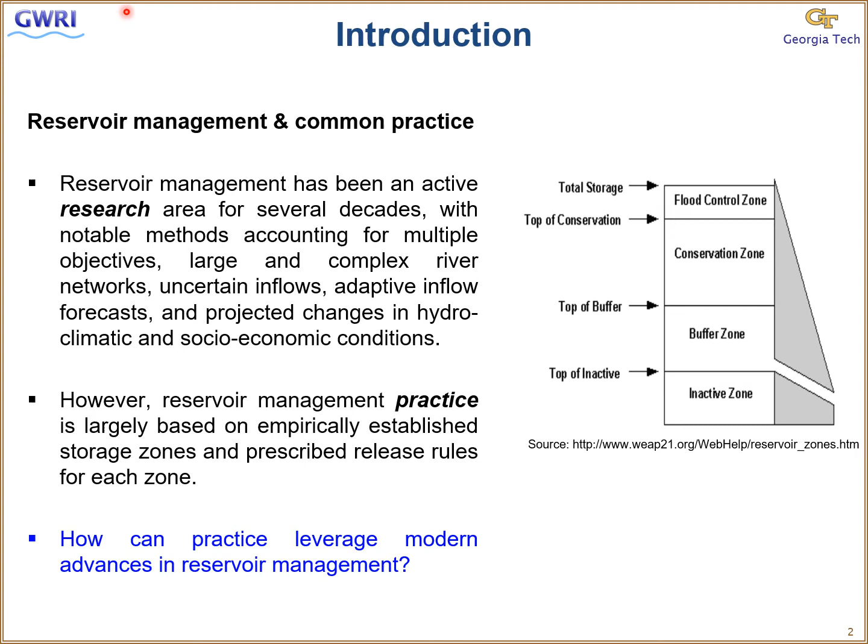The study work plan is divided into 4 main objectives. Objective 1 is the development of a fully adaptive optimization scheme for the reservoir system. The second one is the retrospective assessment of reservoir system response under various hydroclimatic and socio-economic scenarios. The third one is the delineation of concurrent seasonal zones at all system reservoirs based on the optimal reservoir sequences that we derived in objective 2.

The fourth and final one is the performance assessment of the optimized versus the original or current zones through detailed head-to-head simulations with the US Army Corps of Engineers HEC-ResSim modeling.

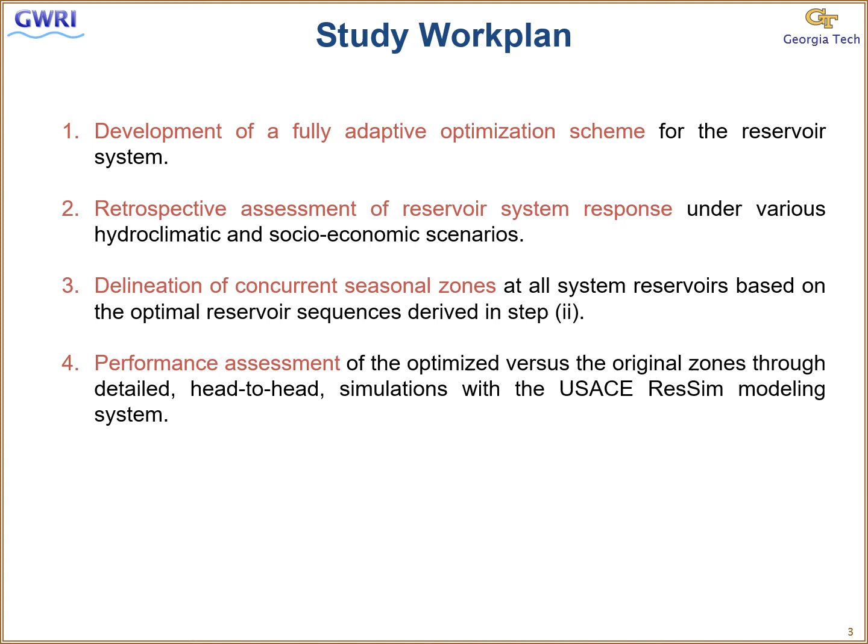The study area is the ACF Basin. The ACF Basin is in the south of the US, between 3 states: Georgia, Alabama, and Florida. The Apalachicola, Chattahoochee, and Flint are the main rivers of the ACF Basin. The ACF Basin starts from the north of Georgia and ends in Florida after passing through Georgia and Alabama. The ACF Basin hosts approximately 4 million people and a wide variety of plant and animal species.

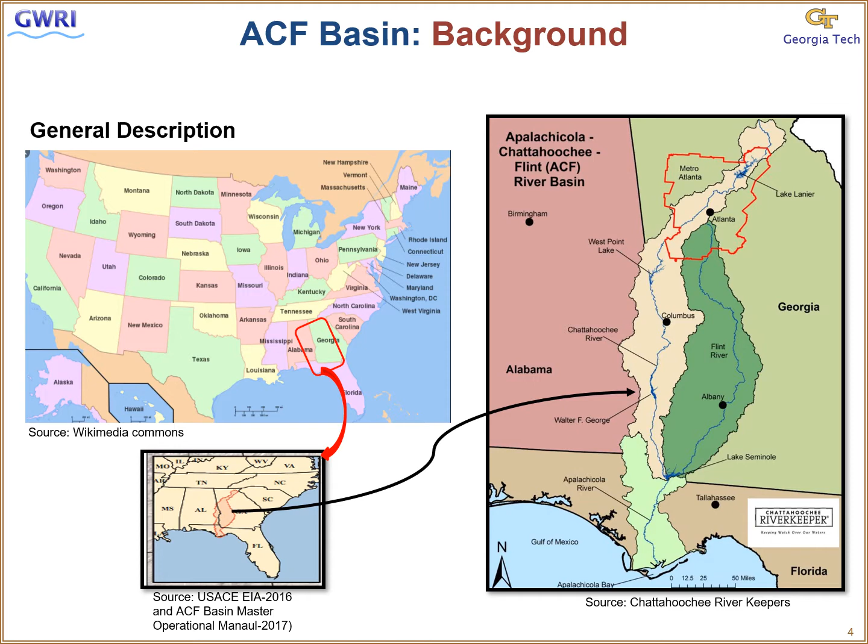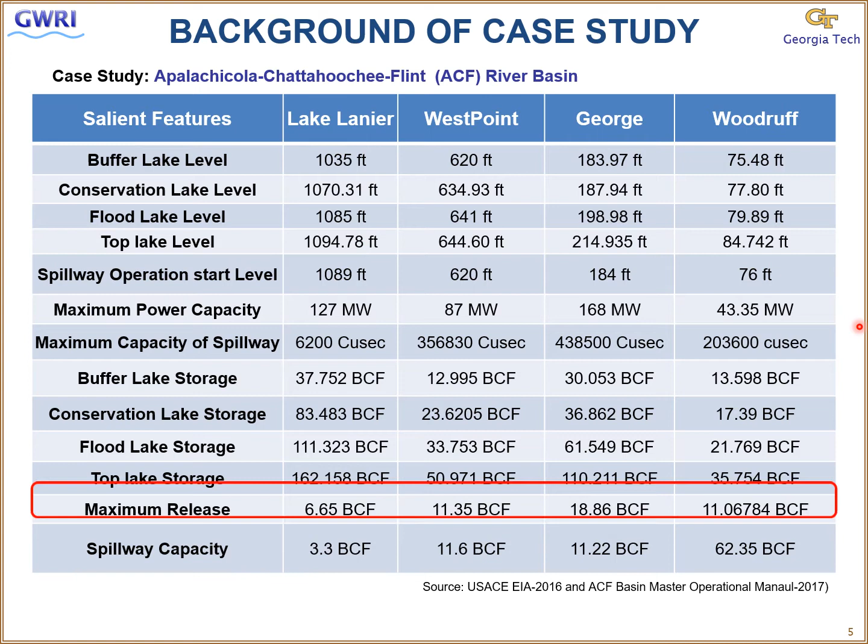In the last 3 decades, due to increase in population and climate change, water demand for each state has increased, which resulted in a conflict between the states. That's why these states have been in litigation for the last 3 decades. In the ACF Basin, Lake Lanier, West Point, George, and Woodruff are the main reservoirs, and among all those reservoirs, George has the highest hydropower generation capacity, while Lake Lanier has the highest storage capacity.

This slide shows the comparison of the ACF Basin main reservoirs' storage capacities versus the local annual unimpaired flows to those reservoirs. This pie chart represents each reservoir's storage contribution to the whole ACF basin storage. It shows that Lake Lanier has 63% of the storage capacity of the whole basin, while Woodruff has 4%. And on this pie chart, we can see the percentage of reservoir drainage with respect to the whole drainage area of the basin. Here you can see that Woodruff has 53% of the drainage area of the whole ACF basin.

In this graph, we can also see that a reservoir like Lake Lanier has the highest storage capacity, but due to its small drainage area has a very small percent of the annual local unimpaired flows as compared to the whole basin. While Woodruff, the smallest reservoir, due to its large drainage area, has a large amount of annual local unimpaired flows.

We can also see in this graph, here is Lake Lanier and that is the catchment of Lake Lanier, here is West Point and that is the catchment area of West Point, here is George and that is the area of George, and here is Woodruff and that is the catchment area of Woodruff. So that makes the basin more vulnerable to seasonal and climate change. That is why we wish to investigate if it's possible to improve the current operational zones.

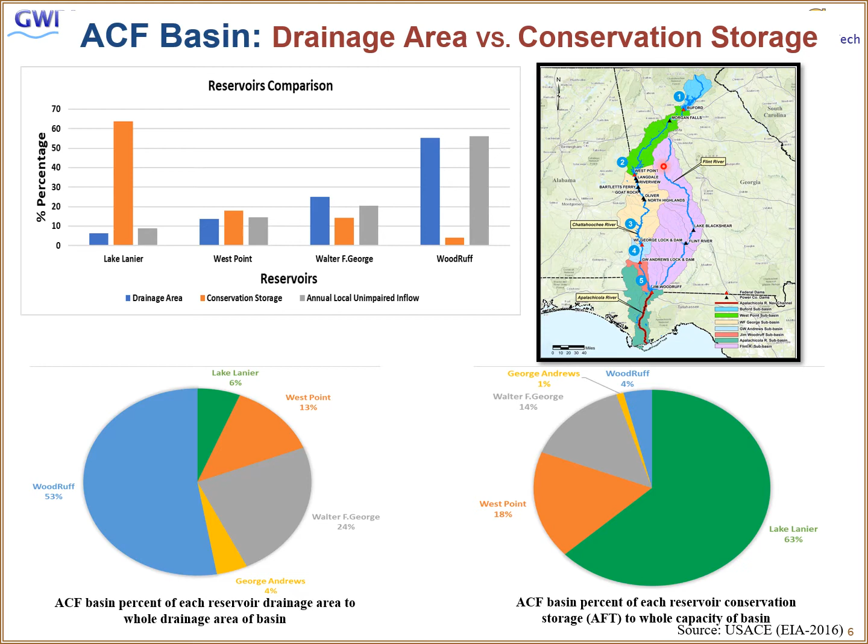These are the current zones of the main reservoirs of the ACF Basin. Buford or the Lake Lanier zones are here. This is for the West Point and this is for the George. Those are divided into 4 zones. Each zone has predefined rules. I will show those rules as an example in the next slide.

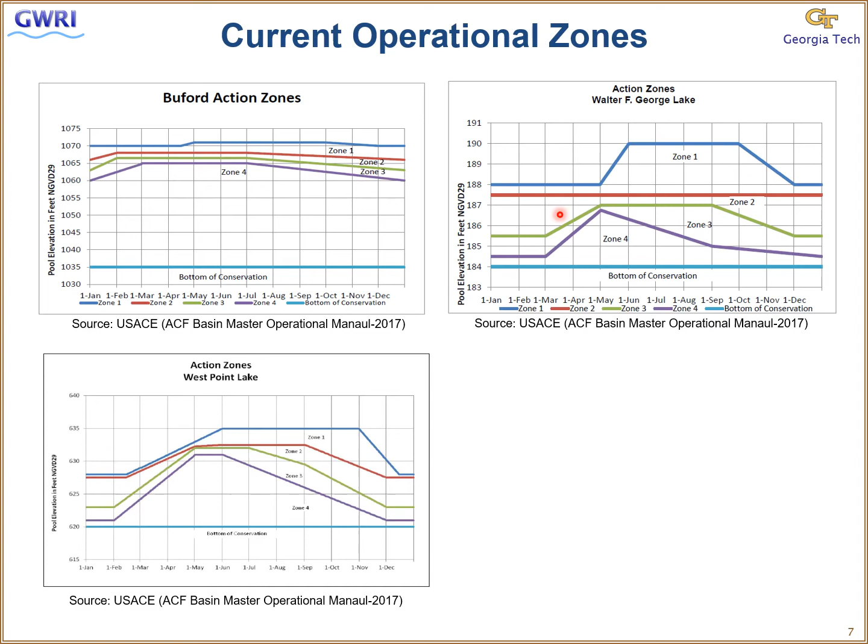Here you can see the release rules for Lake Lanier. So it is like that if the level of Lake Lanier is in zone 1, then it will follow these rules, and if the lake level of Lake Lanier is in zone 2 or zone 3, it will follow that. And those rules are in decreasing order of priority. What does it mean? Once the highest priority rule has been achieved, the reservoir operation focuses on meeting the next priority rule, and so on.

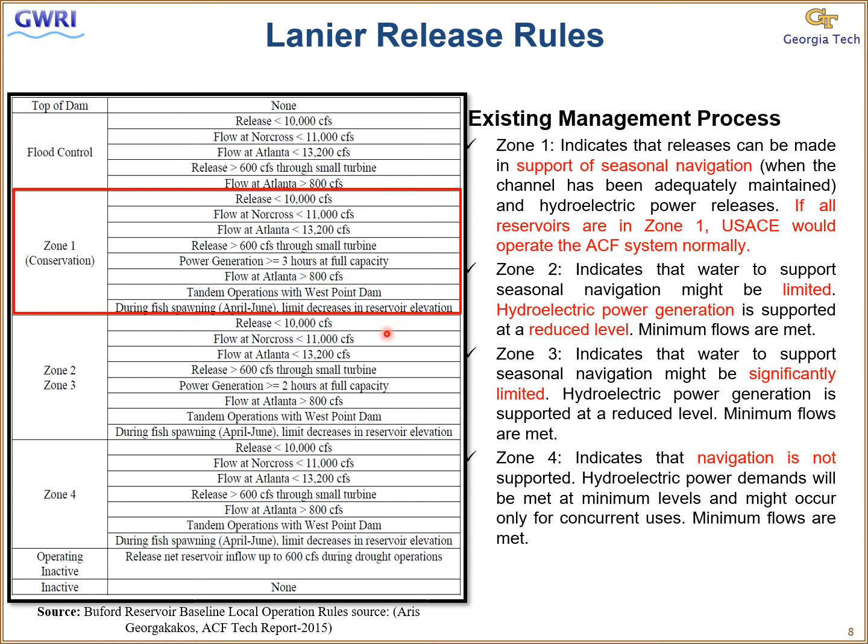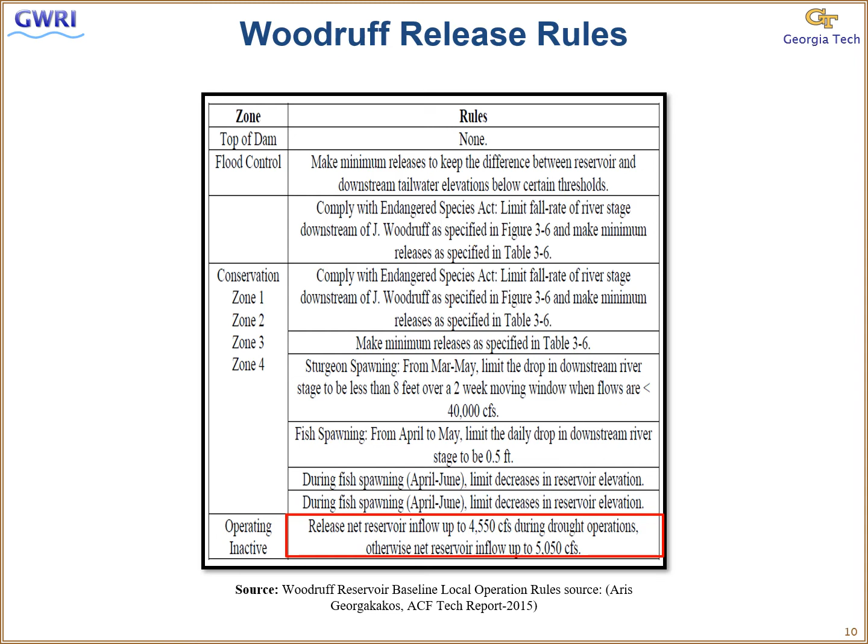In the ACF Basin, hydroelectric power generation facilities are operated by private power companies, municipalities, and the U.S. Corps of Engineers. SEPA is responsible for marketing electric power of the reservoirs controlled by the U.S. Corps of Engineers. The U.S. Corps of Engineers operates those plants as peaking plants. What does it mean? They increase the discharge for a few hours each day to nearly the full capacity of one or more turbines of the reservoir and provide electricity during the peak demand periods of each day and week.

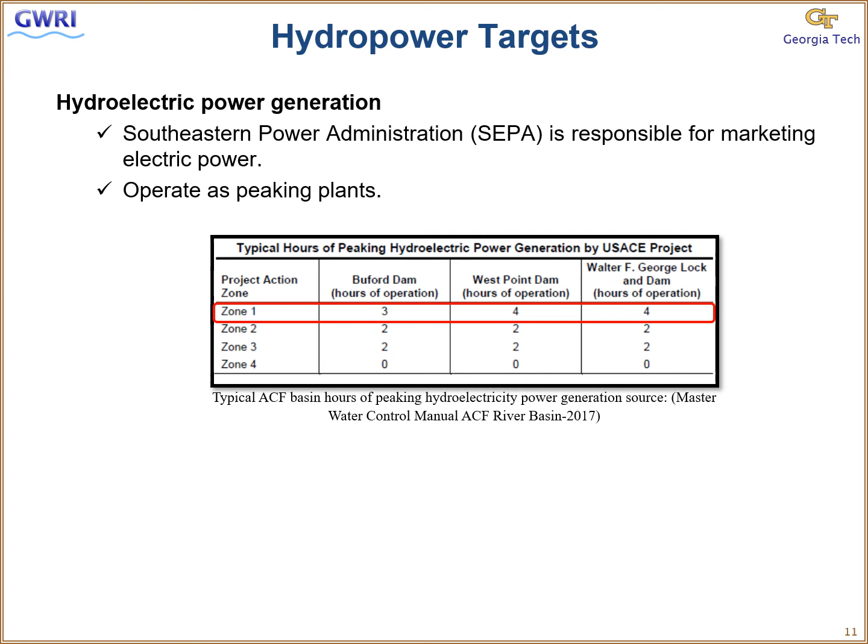During the dry periods, as the level of the lakes goes down below zone 1 or zone 2, hydroelectric power generation is reduced proportionally as pool levels decline.

ACF Basin lakes are among the most visited U.S. Corps of Engineers controlled lakes in the U.S. And those recreational activities in the ACF Basin lakes include boating, freshwater and saltwater fishing, camping, hiking, picnicking, and these recreational activities contribute about 600 million each year to the local and regional economy.

Those recreational opportunities depend on the lake levels. That is why the U.S. Corps of Engineers identifies certain levels in the lake impoundment at which the recreational activities would be affected: initial impact level, recreational impact level, water access limited level. So the objective or the target of the optimal operation is to avoid the lakes going beyond those levels so that the recreational activities will not be affected.

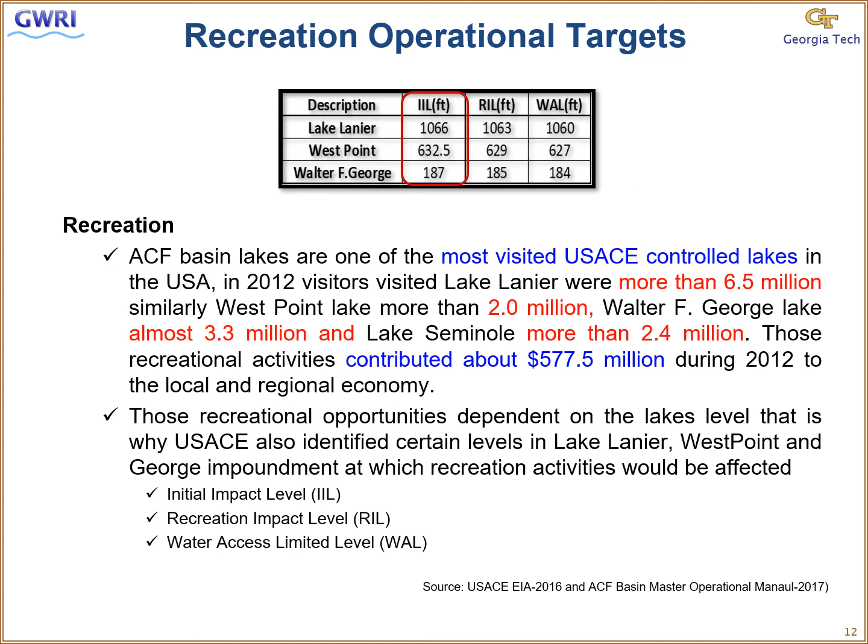Methodology to attain the objectives that we defined earlier. In order to develop a fully adaptive optimization scheme for the ACF Basin, we develop a GWRI dynamic optimization model that is the true representation of the model, and then run that optimization model over the study period of 1939 to 2011, and then get the optimized sequences, and on the basis of those optimized sequences develop revised operational zones for each reservoir.

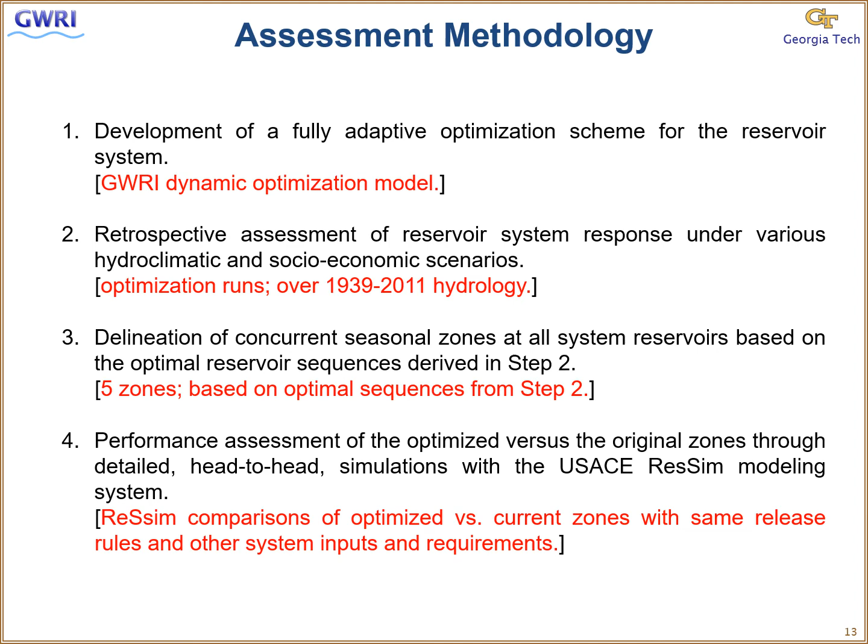And then to develop a performance assessment comparison, we use HEC-ResSim and run with the optimized and the current zones with the same release and the other system inputs and requirements, and compare the results. This is the complete methodology of the research, and if anybody is interested to know more in detail, we are happy to answer in the question and answer session.

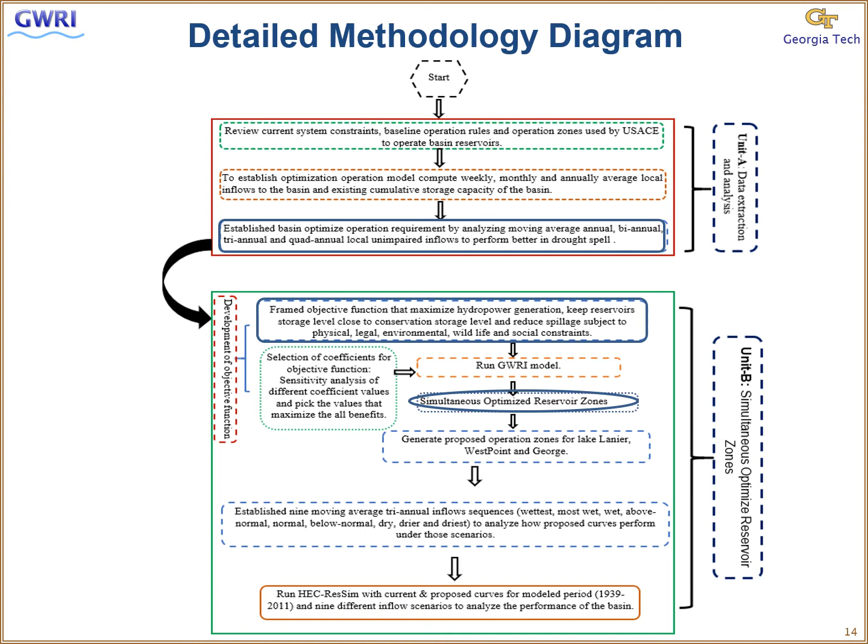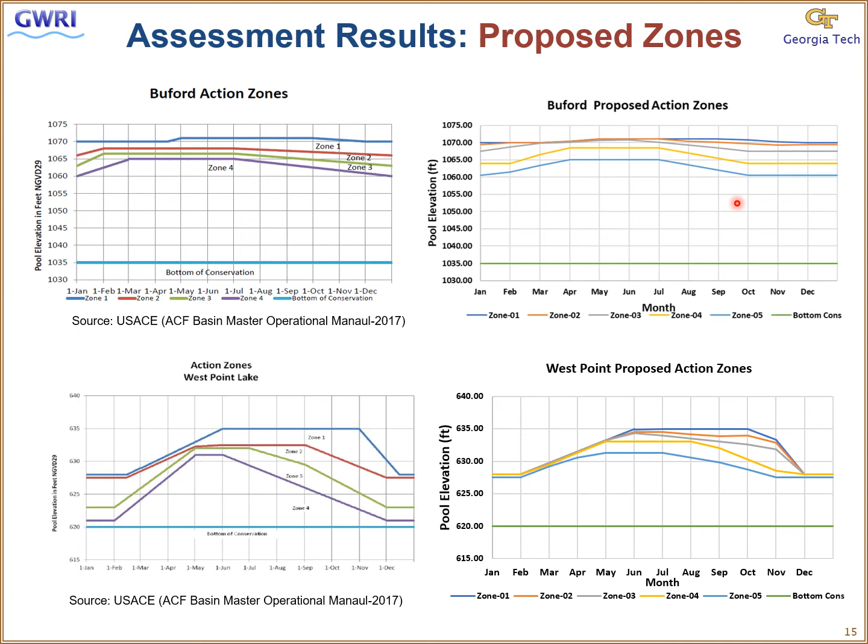An additional operational zone has been added to Lake Lanier, West Point, and George to operate those reservoirs more optimally. Also, those zones are in tandem with the same zones in the downstream reservoirs. It means if the downstream reservoir storage is lower than the upstream reservoir, additional releases are made from the upstream reservoir to keep all the reservoirs of the basin in the same zone.

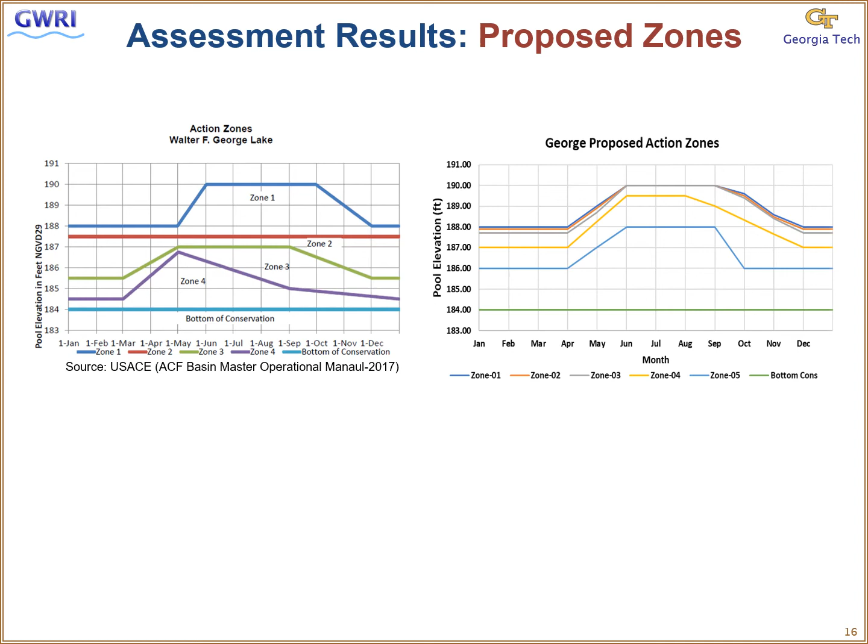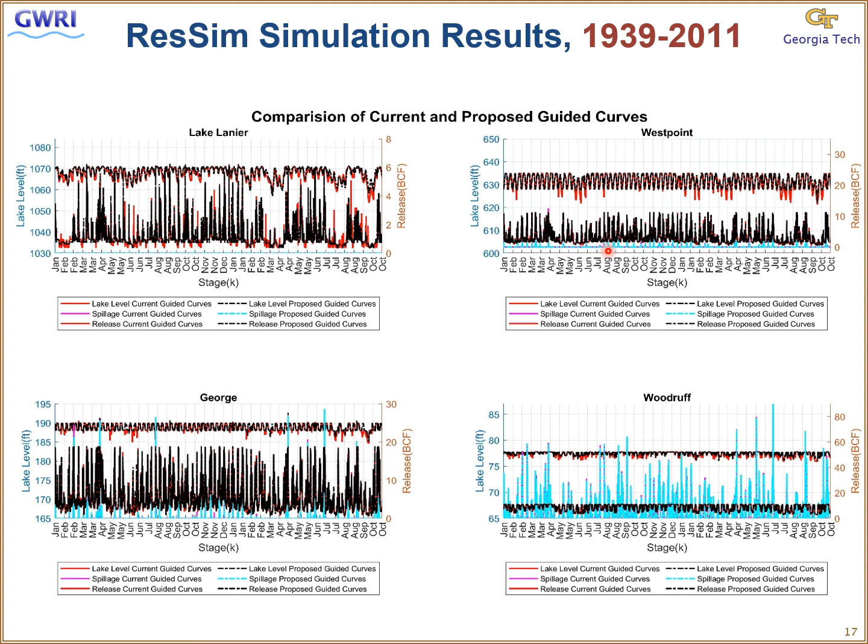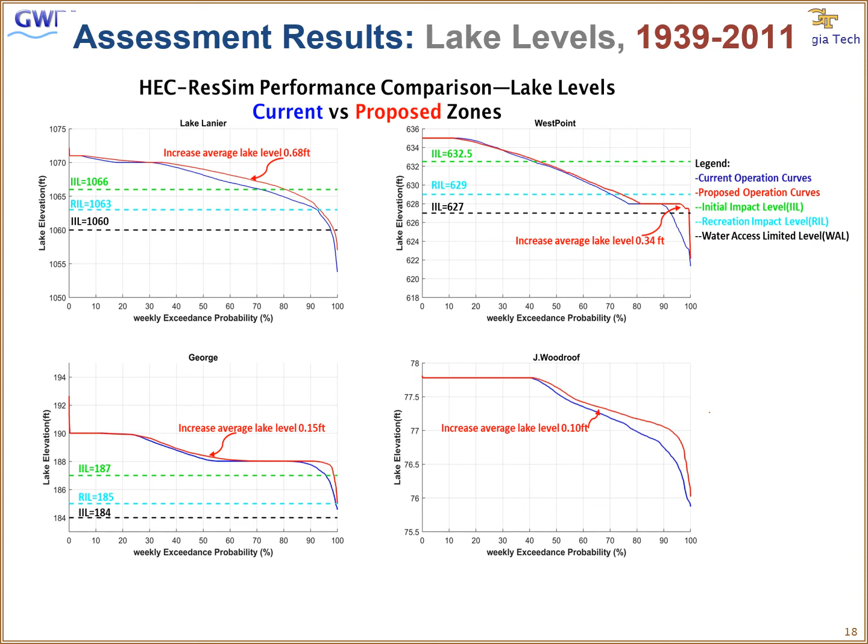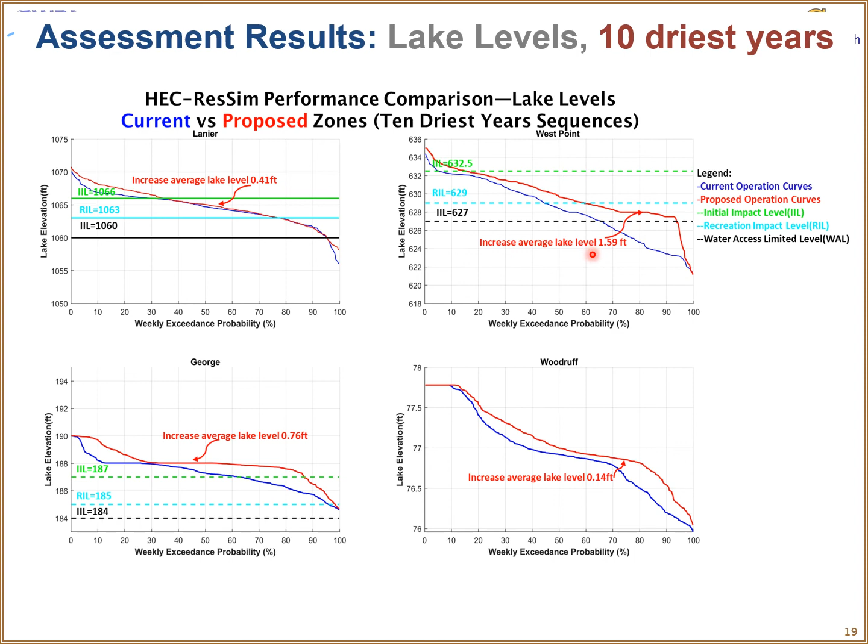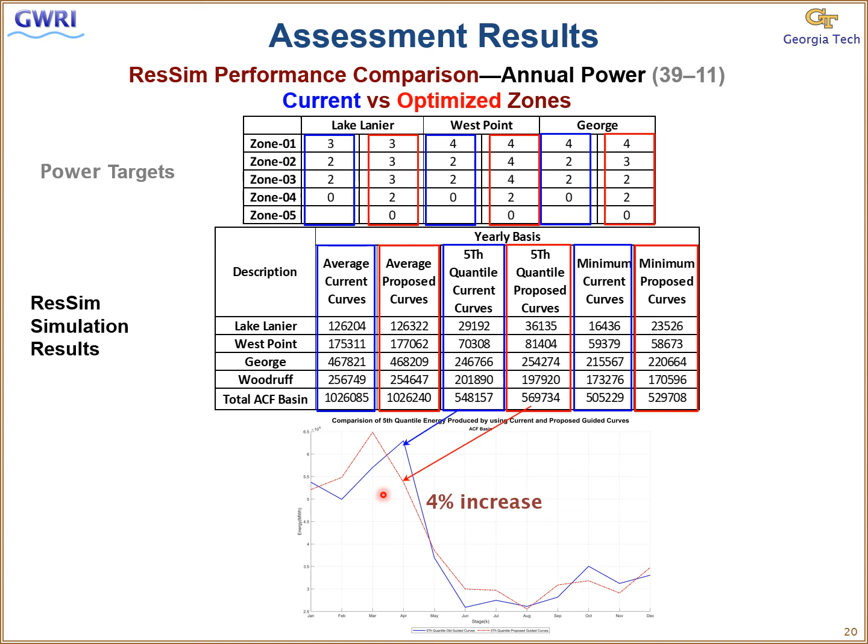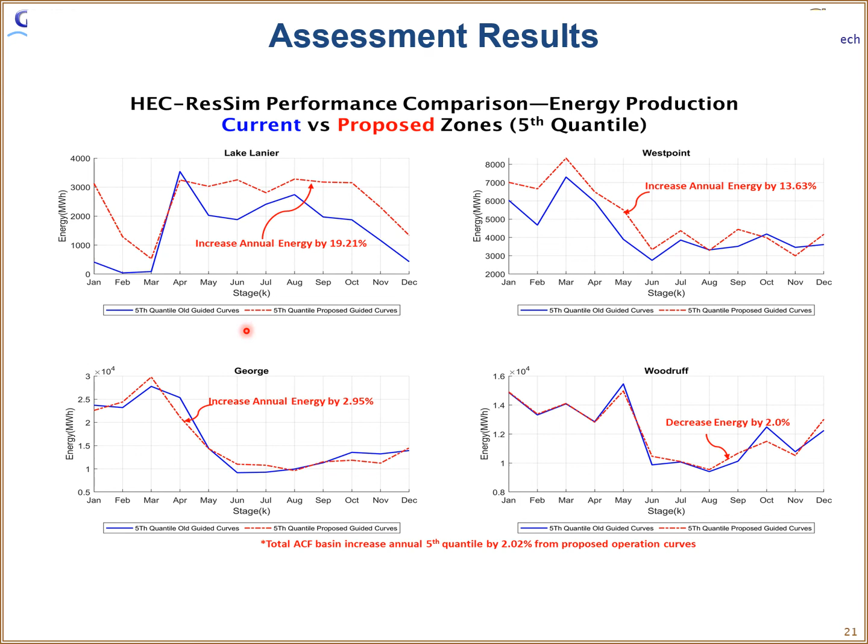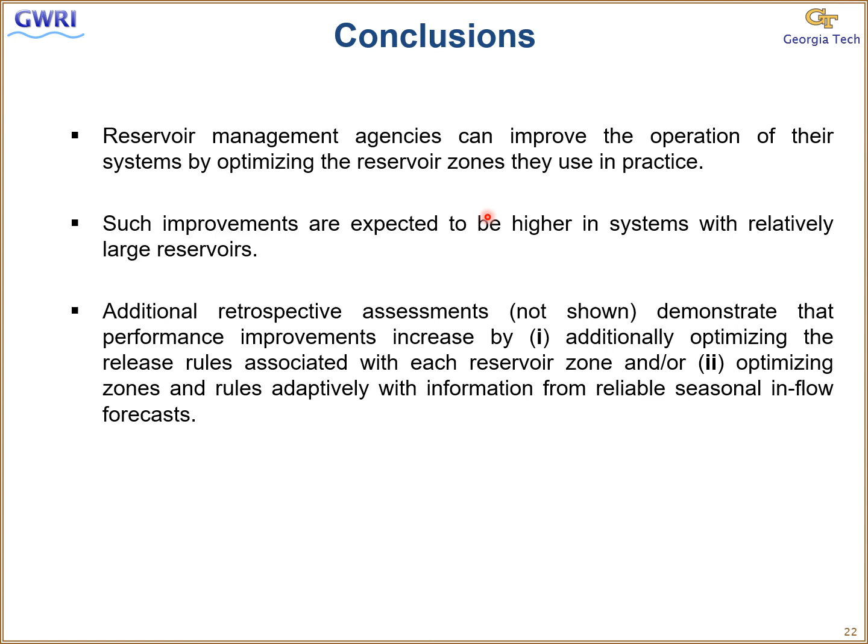There are three main conclusions of the research. Number one, reservoir management agencies can improve the operation of their systems by optimizing the reservoir zones they are using. The second is that such improvements are expected to be higher in systems with relatively large reservoirs. Additionally, retrospective assessments not shown here demonstrate that the performance improvement can be increased in two ways: additionally optimizing the release rules associated with each reservoir zone, or optimizing the zones and rules adaptively with information from a reliable seasonal inflow forecast.